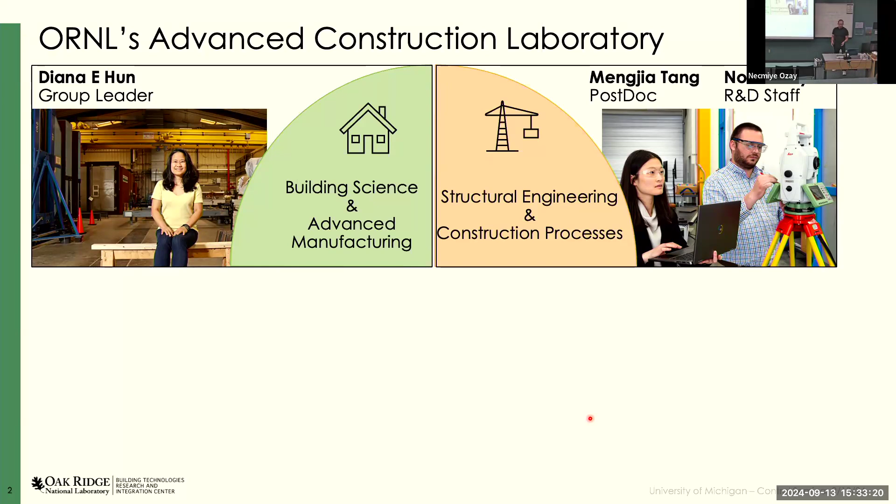You have me and Yifang Liu. We are the controls and robotics team, always on the whiteboard writing math and pulling our hair out. We recently hired two postdocs who are our computer science and artificial intelligence team. They recently participated in a hackathon at ORNL, where we tried to drop some of our deep learning algorithms into Frontier, the fastest supercomputer in the world. So they're there hacking and having fun. It's been great.

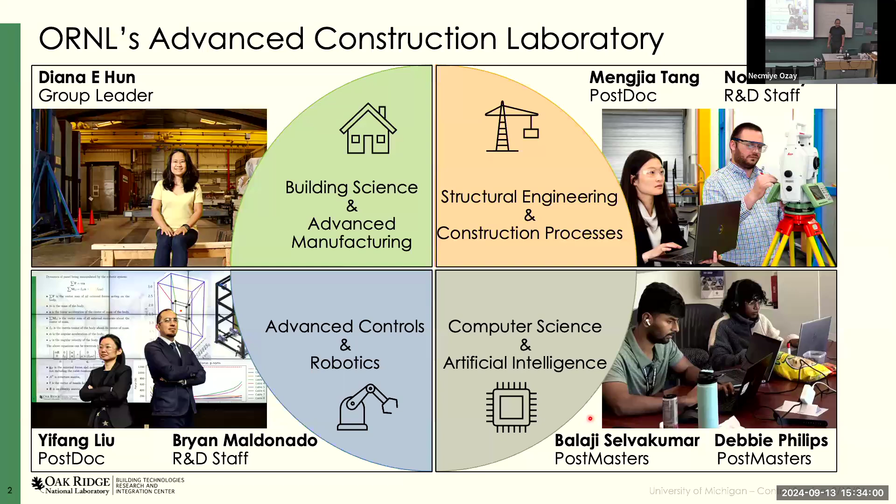So let's start with some motivation.

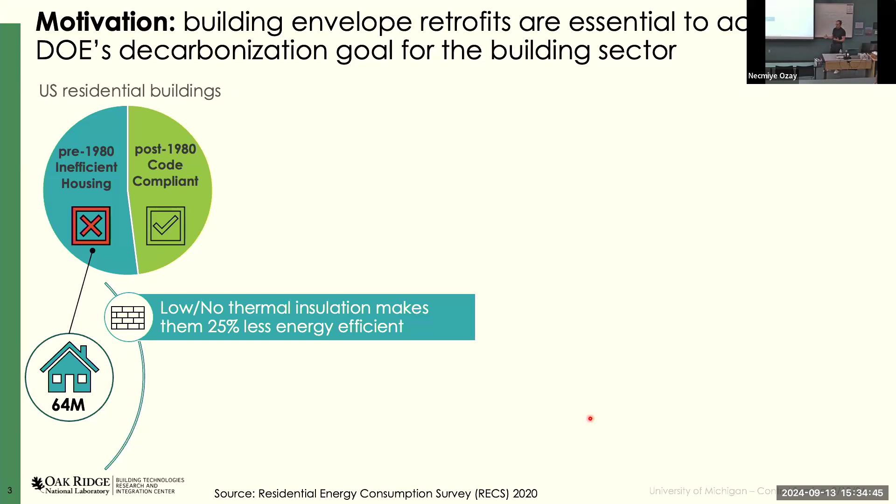The main motivation is what's happening right now with residential buildings in the US. Most buildings were built before the 1980s, before building codes started to be in effect in the US. This means these houses are very inefficient, and there are more or less 64 million of them. They're inefficient because they have low or no thermal insulation, so the heat produced to warm the home escapes through the walls or roof, or in summer a lot of heat gets inside, requiring more cooling capacity. That makes them 25% less efficient compared to modern houses.

Because of this waste of energy, a lot of the carbon dioxide emissions produced within buildings comes from the envelope, which is responsible for about 70% of this. The envelope is basically the walls, the roof, everything involving the living space. So there is a lot of heat wasted. Another important thing is that out of the 64 million houses, 50 million belong to low-income households, meaning they have to use a lot of their income to pay energy bills.

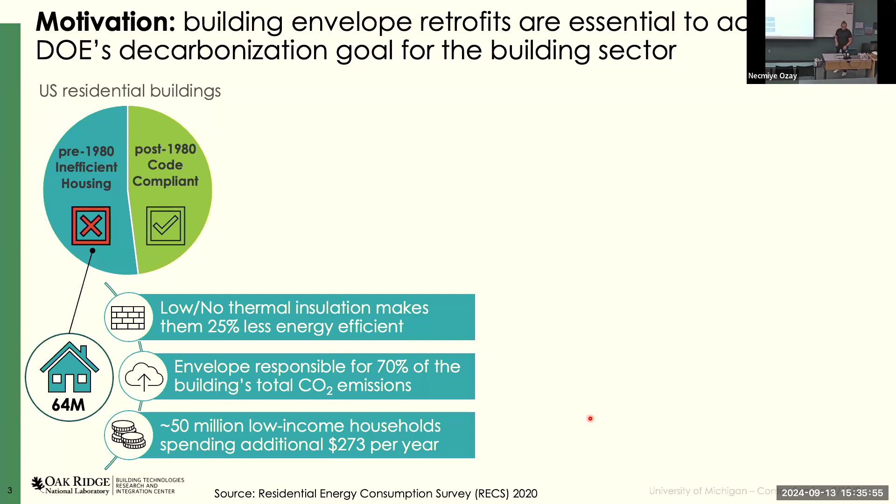On average, low-income households have to pay around $273 per year in addition to what people with more efficient houses have to pay. So this is a lot of burden for low-income households. That's why the Department of Energy now has this big project and big investment on retrofitting these old buildings.

We want to bring these old buildings up to code, make them more efficient. There are basically three main ways of doing it. You can retrofit the building equipment, so that's your HVAC, refrigerator, lighting, things like that. The fenestration, which are the windows—nowadays there are very high-tech windows where you lose very little heat through them. And the last part, which is the one that I focus on, is the building envelope: walls, attic, and crawl space if the house has one.

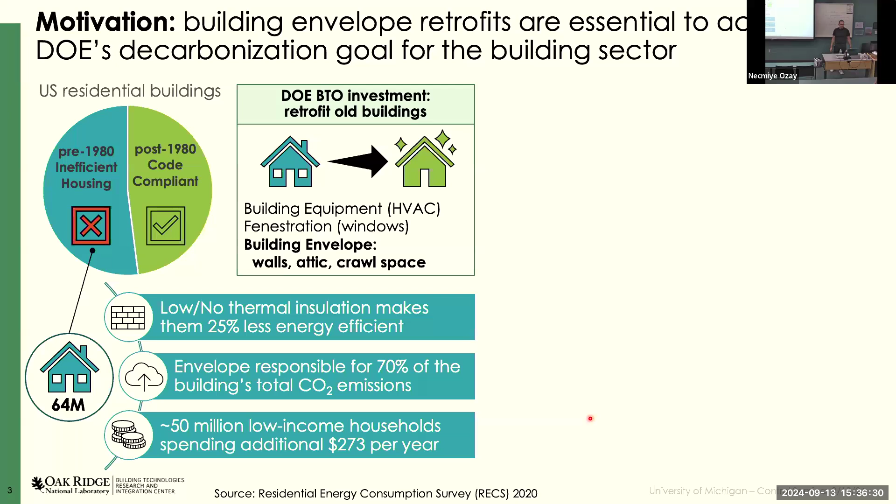In order to communicate this, the Department of Energy has written two main pieces of information. One is the National Blueprint for Building Sector Decarbonization, which basically elaborates all the issues that exist right now and all the potential for researchers like us to tackle and help this sector. The other thing is super important: one of the Energy Earthshots, these very ambitious goals the Department of Energy has—like hydrogen or solar—now affordable home is one of them. So there's a lot of interest right now in bringing these houses up to code and making them more energy efficient.

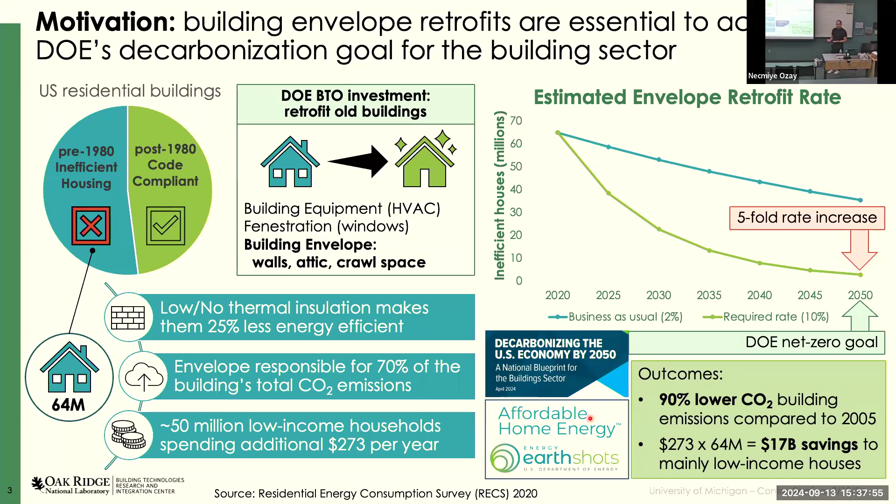So that is the motivation. That's why we're doing this.

So what is the challenge? One of the main things is that the building sector has typically resisted automation. This is a comparison of different sectors. You can see agriculture—if you compare 1940 to 2016, agriculture has grown by a factor of over 1,000, manufacturing by a factor of over 700, and building construction by a factor of 6. This is quite embarrassing. You can see the differences here—the only difference is that now we wear hard hats, which is good for safety, but otherwise it's still very manual, very rustic. There's been a lot of inertia to automate in this sector.

Another important challenge is that right now we're facing a lack of skilled labor. There is a labor shortage—the latest numbers I heard were about 500,000 people that we're lacking to keep up with the demand of housing. So it's a severe problem.

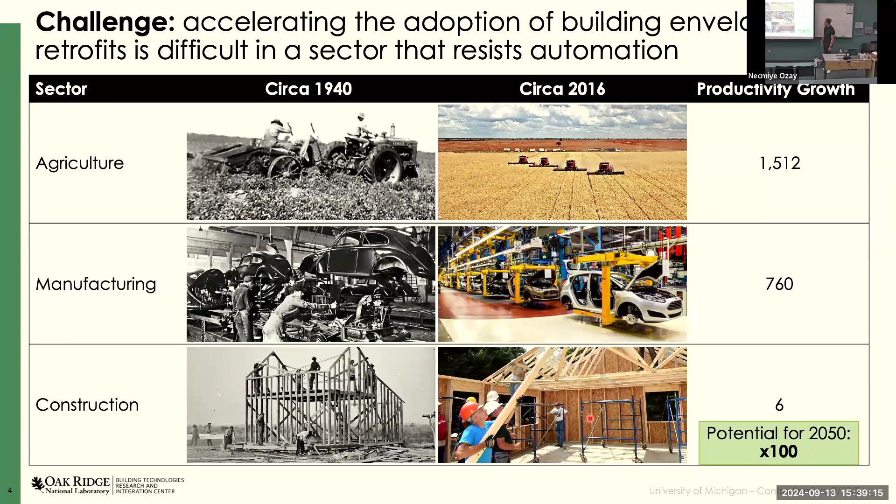So with all of these plans that we're going to present, the potential for scaling this number is to bring it up to at least a factor of 100 by 2050. Again, super ambitious goals.

The innovative solution for this actually comes from Europe, from a program called Energiesprong, which has been quite successful and popular. It can be found in the Netherlands, Germany, France, and the UK. Basically what they're trying to do is retrofit buildings with the minimum amount of disruption to the occupants. So that's an example of a building that you want to retrofit.

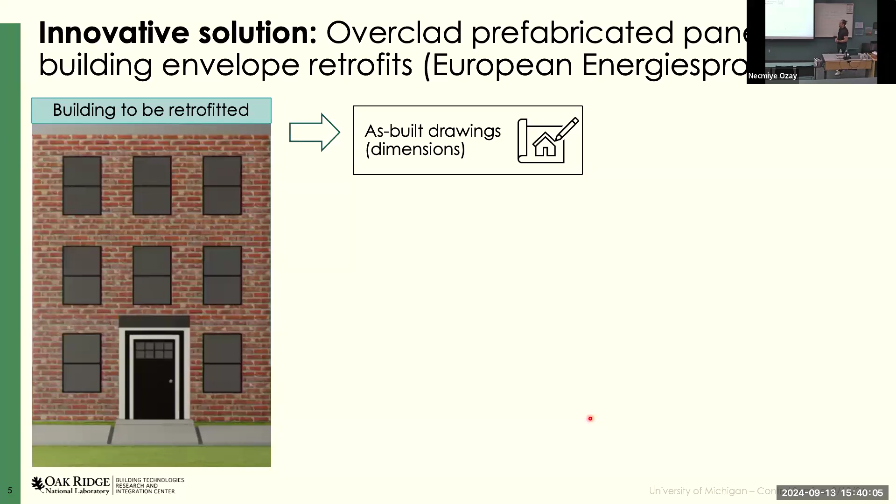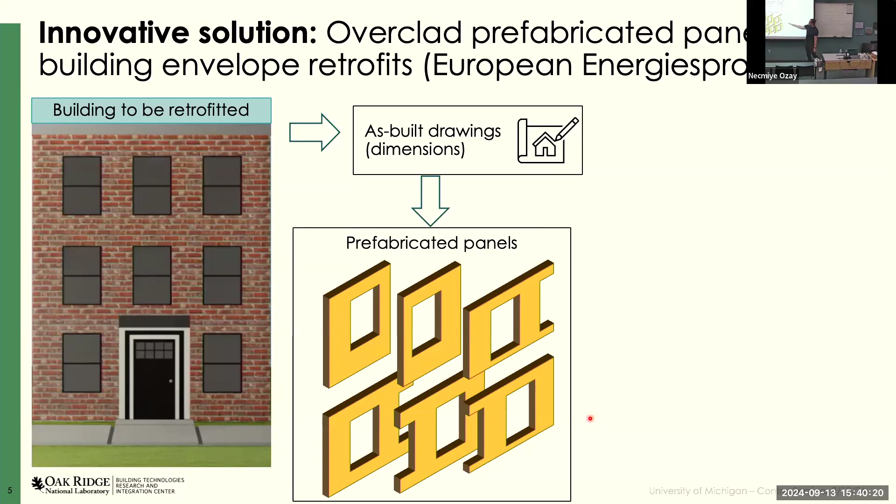What you do is a survey to determine the dimensions of the different components—you measure where the windows are, where the doors are, the dimensions and all of that. You create an architectural drawing of it. Then you design panels that can be prefabricated, meaning they're made in very tight manufacturing conditions, super high tech. Then you ship these to the construction site and install them, like a Lego block set—you cover the building, and now it's up to code. Super popular, but it comes with a lot of buts—there are a lot of problems here.

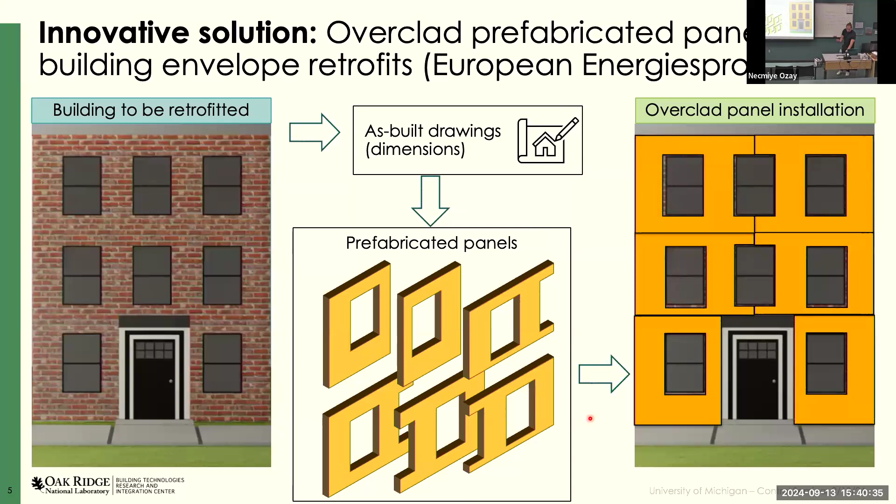Let's see—this is a video from Estonia, from one of our friends there, showing an example of an older building being retrofitted.

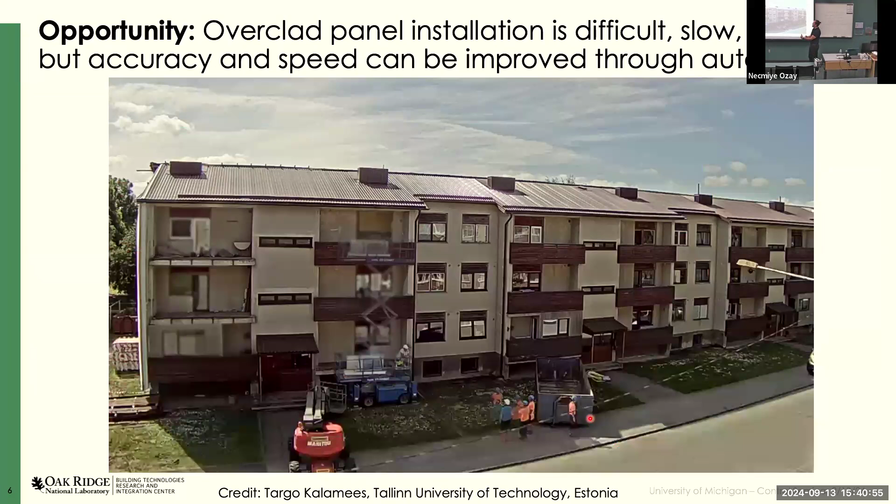So in this, the term that you're gonna hear a lot is overclad panel installation. Overclad meaning that it's over the existing wall. And let me play it.

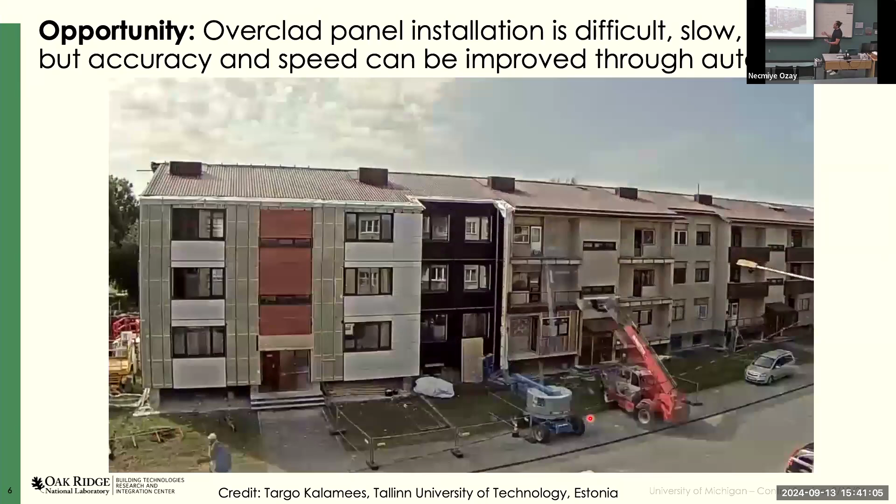So you will see that this is very manual. It requires a lot of different machinery. They have to remove certain components. Then we bring the panels, and they start installing the panels here and here. These are the prefabricated overclad panels that they install.

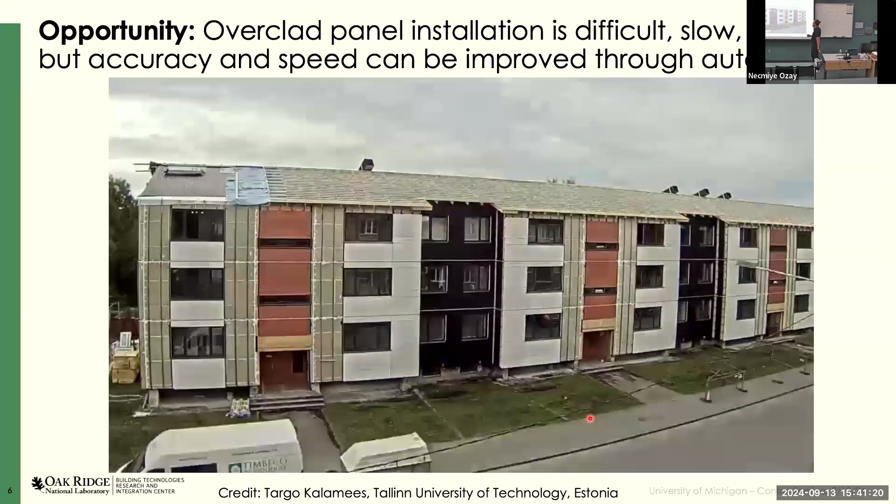They also have to deal with the roof, but you see people everywhere. There are people climbing the roofs, people installing the panels. So it's still very manual.

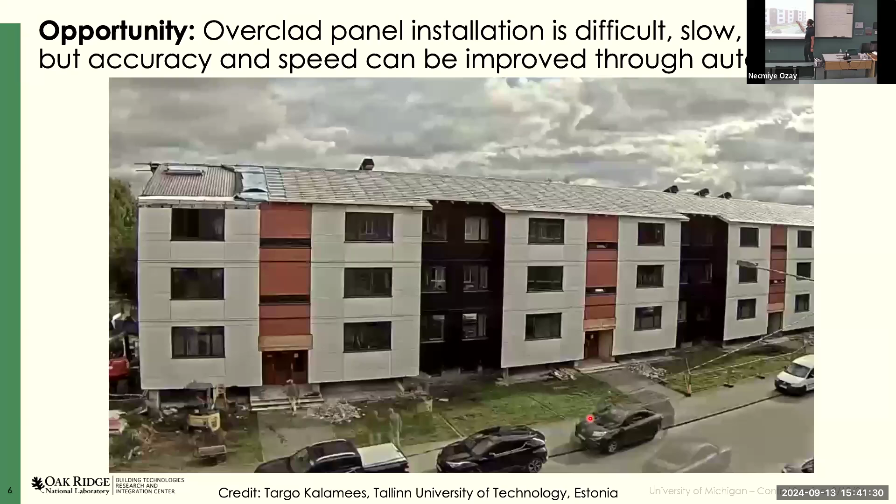There is no true feedback, so you don't really know if the panels are installed correctly. There might be some air gaps, or there might be some overlap between panels. That means you have to then rework and cut some pieces of the panel, which amounts to a loss of time and money.

So our research focus is to automate this process by closing the loop. I'm gonna walk you through what the control loop looks like. You have the building that you want to retrofit, and you have the panel that you want to install.

The first thing that you do is create a digital twin of the building. Basically this is a geometrical twin where you have all the architectural designs, where things are, because you need to know your target position. We are doing this using LiDAR scanners, super accurate LiDAR scanners.

Now that you know where things should be, you need to know where things are. So you need to track how these prefabricated panels move in space. We are using laser trackers for that, IMUs, and we want to introduce cameras as well. Basically this tracks position, orientation, linear velocity, and angular velocity.

So then you know where you want your target, you know where you're at in real time, so then you can calculate the error. This is the key part of the feedback loop.

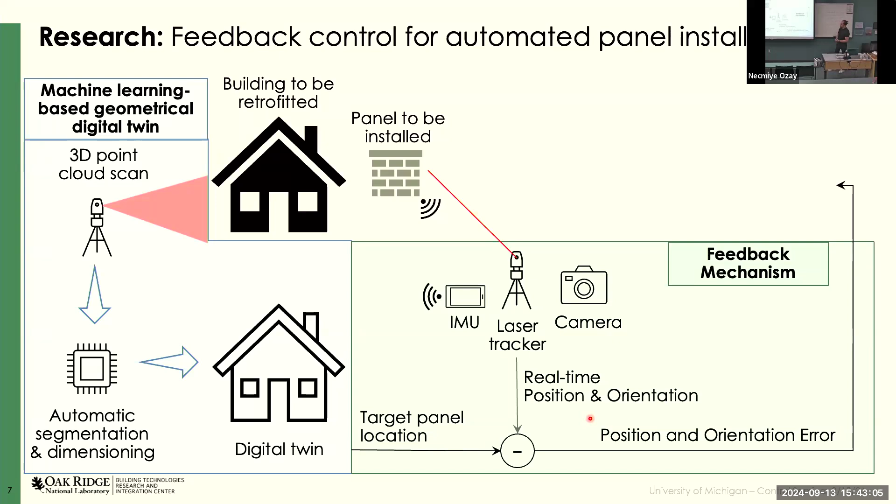Once you have that, you could provide this feedback to a human installation crew, which I'll discuss later on. But you could also provide this feedback to a robot. And that is the last part, how you can use this to enhance robot installation, to make installation faster, less dangerous because you don't have crews moving along installing these panels, and also more accurate.

So I'm gonna talk about each of these components separately. You can see how the dynamics and controls come in here, and the machine learning comes in that part. So I'll show you how we generate digital twins of buildings.

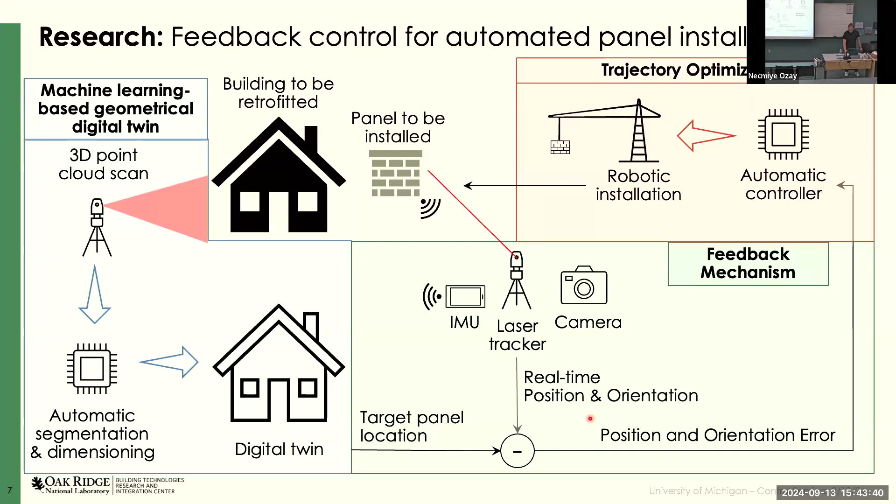In the first part, the problem is that you need to get the accurate as-built dimensions. And I really want you, after this, to go to your house and take a square ruler and try to find right angles. There are no right angles in houses.

Windows, all of them are crooked. Walls are probably not plumb. So you have to face all of these issues when retrofitting this. You have to capture every single crookedness in order to design the panels appropriately.

Right now, with some commercial methods, you can get accuracies of around 13 millimeters, which is half an inch. But we really want to achieve an accuracy of 3 millimeters, because the more accurate you are, the tighter you can retrofit the building, and the tighter you can keep the heat inside. It's all about efficiency, so you don't want to have air gaps. That is our target.

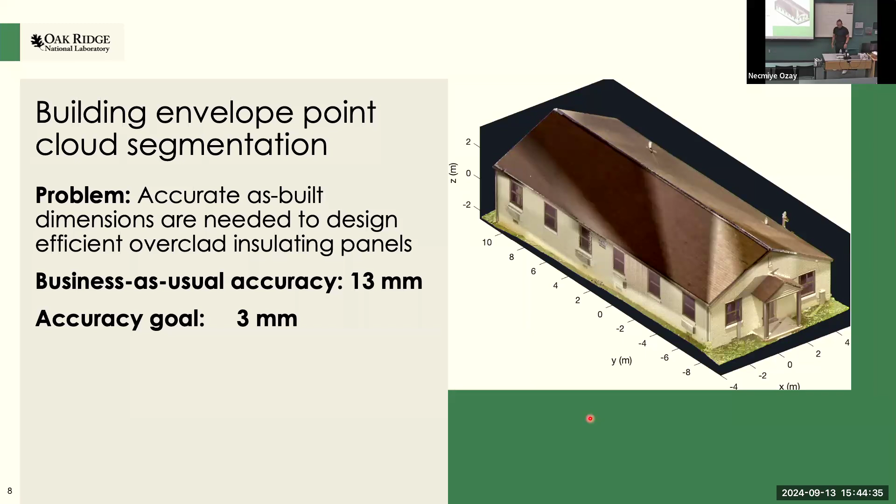So we developed this algorithm that is the automatic point cloud building envelope segmentation. We call it Auto-CuBES. Basically what it does is it takes this point cloud. We use LiDAR to scan the building from all the different facades, put all the point clouds together, and then we have this super nice, highly detailed twin of the building.

But we do not need to know all of these details. So what we really need is to extract the dimensions of each component, simplifying from around 32 million points to around 300, which are the really important points that you need for designing these panels.

And the idea is that we are using several machine learning algorithms to do this, instead of having a human try to do this segmentation task. We have had excellent results, especially on time reduction.

There are companies that can do this process manually, and they will tell you, yeah, we can do it, but give us 2 days. There are some semi-automatic methods that maybe can do it in 4 hours, but we can do it in 12 minutes. So this is a significant reduction in time.

But the main gain is really the accuracy, because now you have the true accuracy of the LiDAR machine to detect the dimensions, rather than the human subjective perception of, oh, this is the dimension of the window, or this is the dimension of the door, which once you drill down to the details, is very subjective how we measure things. So this is quite interesting to have this part.

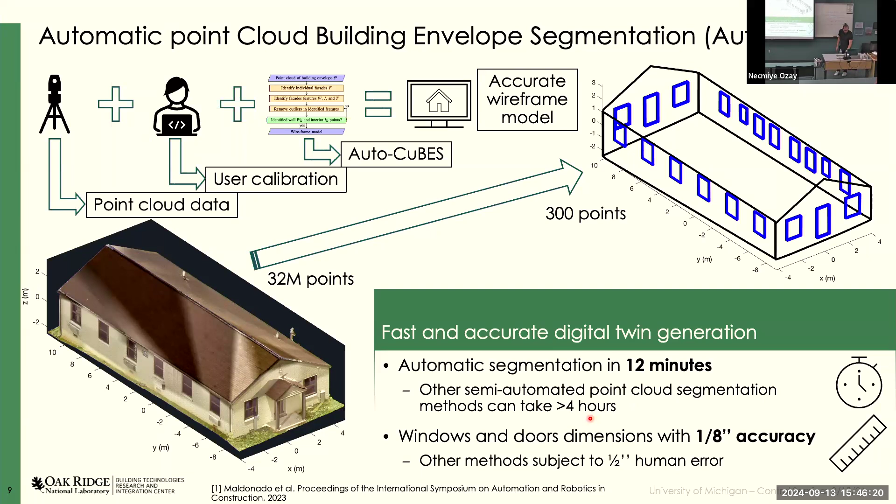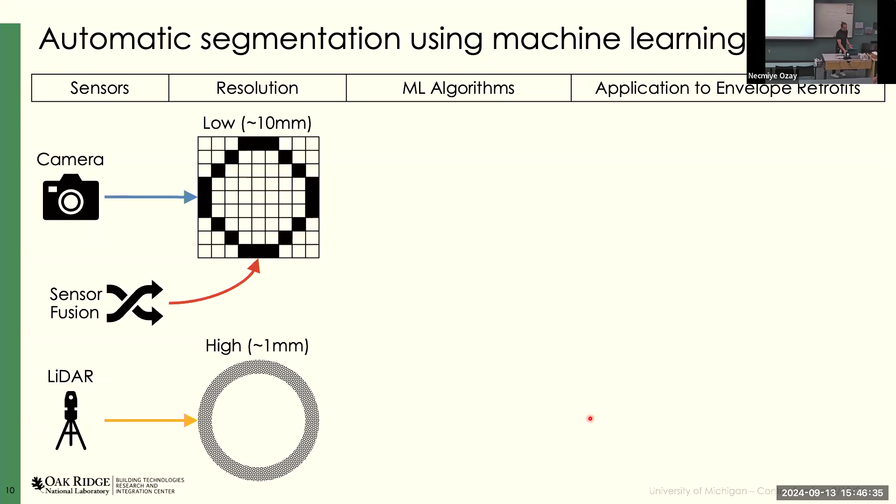So let's talk about the machine learning part. There are 2 main sensors that are used for segmentation: the camera and the LiDAR. If you are into machine learning, you might have seen that the camera works very well, because the pixelation basically gives you a matrix, and you can do a lot of nice matrix operations like convolution and things like that. But you lose accuracy, and we are all about accuracy.

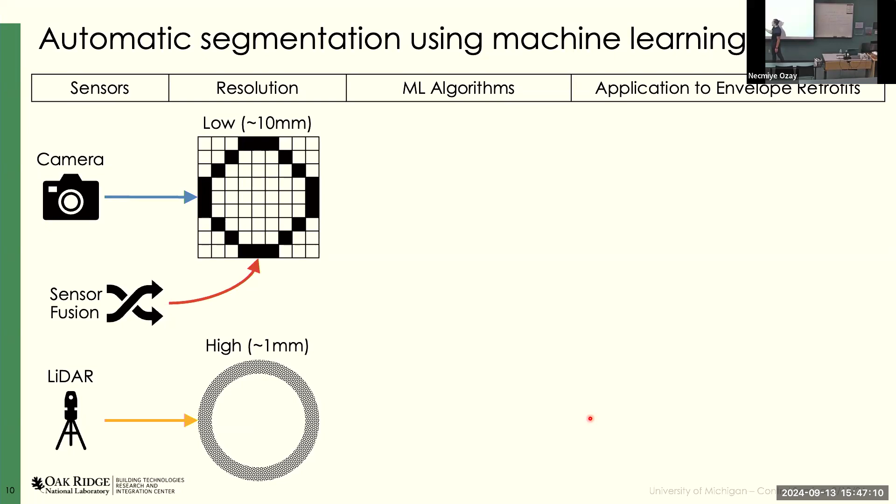So the LiDAR can give you a super nice, fine, accurate point cloud, but now you're losing order, right? The pixels in a camera are an ordered array. If I give you an array and I shuffle the elements, it produces the same thing. So there is not that nice structure. It gives you more detail, but it loses that structure that cameras have.

So precisely for that reason, supervised learning has been used mostly with cameras, or even if you have sensor fusion, the segmentation really happens in the camera.

So there has been a couple of studies that use cameras for segmenting buildings, but again, these are not automated. There are promising developments on deep learning where you can do segmentation of point clouds, but these segmentations occur with everyday objects like chairs, tables, things that people just scan, or autonomous vehicles. So you can segment the road from the trees, but there is no really data set on building envelope.

So we cannot train a neural network if we do not have labeled data. So that is the problem that we face. That's why we went for unsupervised learning.

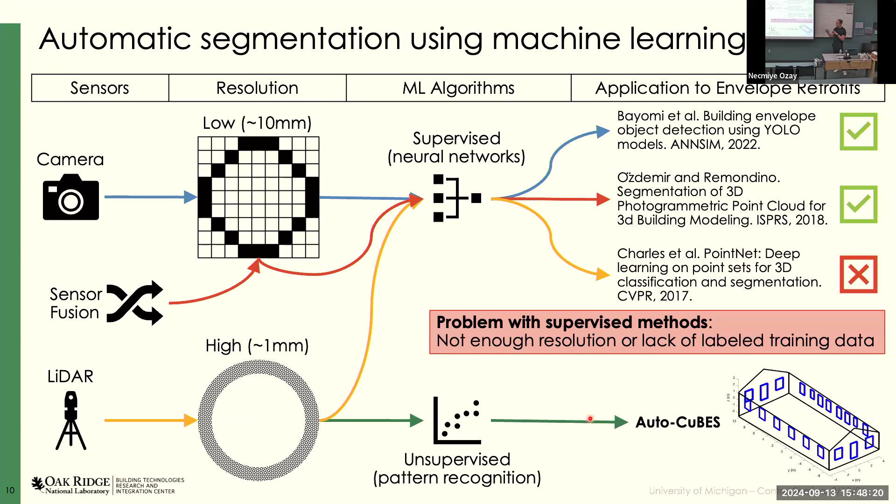And the challenge here is that with supervised learning, you have just a network that does everything for you, while with unsupervised learning, you have to be more systematic. You have to go step by step, trying to break the problem into simple components, and then break that component into more simple components, and then solve the problem.

And the cool thing about all of this is that we can observe a lot of differences between the wall and the window, but geometrically there is a very clear difference in which the window most of the time is recessed with respect to the wall.

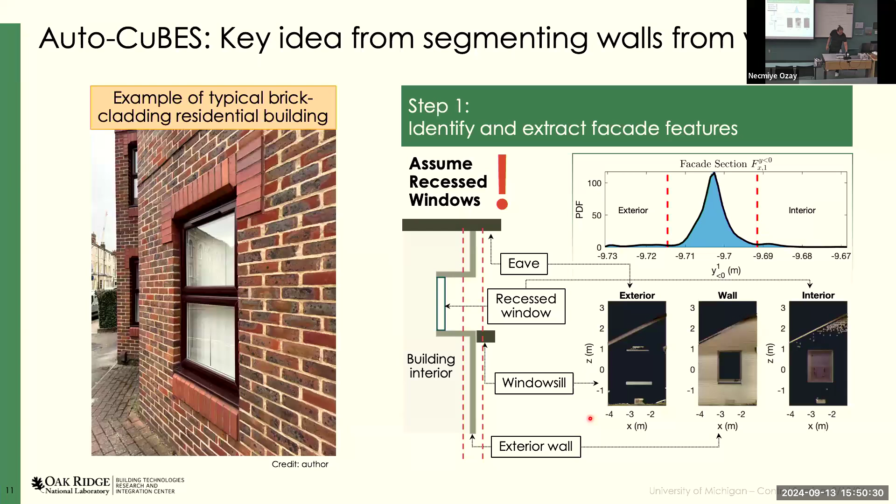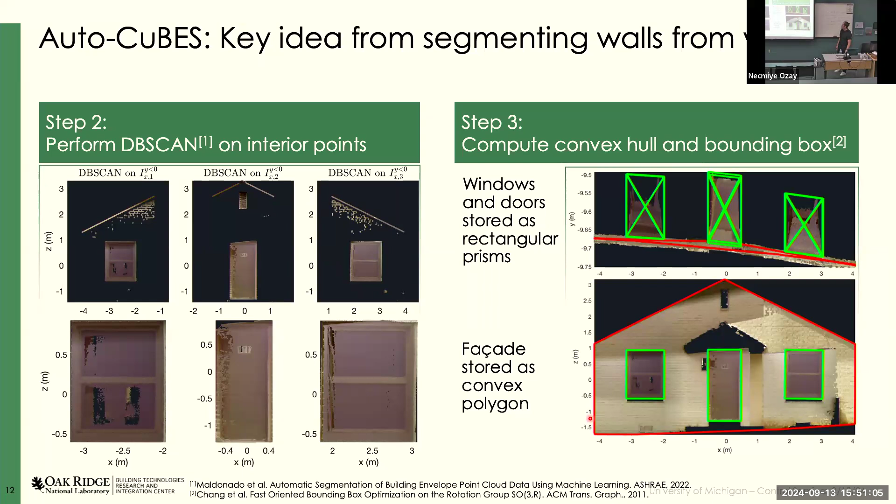So you can use DB scan and say, okay, I want to find the location where the most density of points are. You find them, and after that you simply solve the bounding box problem, which now there are algorithms that can solve very efficiently. You just use a bounding box to find where the things are. Of course you're constraining this as a rectangle or a box, but it works well enough in our experience. So that is how you can generate this digital twin from the data and extract the parts that you want.

So the next part is, okay, you know where things need to be. How do you know where things are?

We call this the real-time panel position and orientation evaluation. You can see in this picture a traditional way of installing panels. You have your prefabricated panel here, a hole where the panel should go, a crane with a crane operator, and the installation crew. The installation crew has walkie-talkies, and they tell the person operating the crane, okay, move it a little bit to the left. Okay, now move it to the right. Okay, I think this is good. Just drop the panel. Okay, yeah, seems good. Okay, move to the next panel.

So there is not really a good way of measuring how well the installation is happening. There is a lot of eyeballing and hand waving, and that gives you a certain level of accuracy, but not the one that we need.

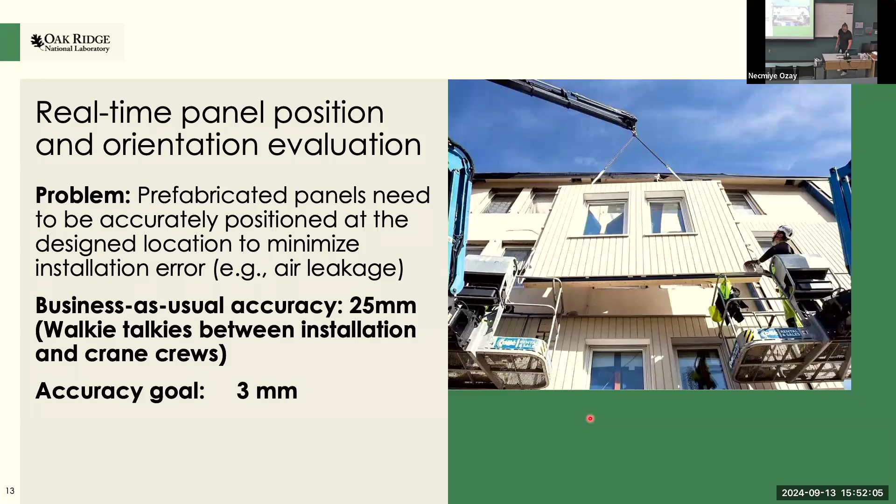So how have we done this? We created this digital tool that we call the real-time evaluator, which actually recently won an R&D 100. We're very proud about this. The whole point of it is, once you have the digital twin, you can track where the panel is, and then compute the error and communicate this error to the crew. So this is your feedback mechanism.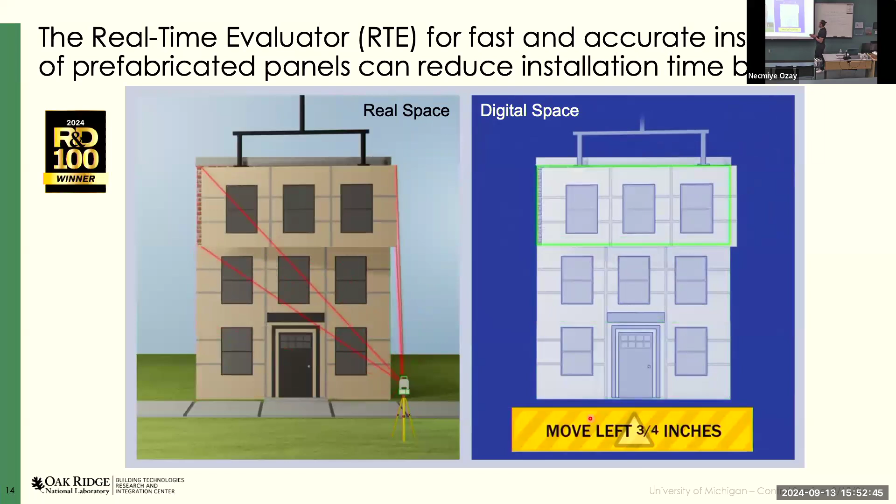Right now it's human in the loop. You give the feedback to the human to say, you are 3 millimeters off, move it here. You are 3 millimeters to the front, push it back. So you can communicate with the crane operator in a very precise way, and you can see in real time how the error reduces.

We have done this obviously at the lab scale, but also at the big scale, and it actually works quite nicely. So what do we need from here?

Quite accurate equipment. To track where the panel is, we install these prisms in the panel, and basically this is a robotic tracker. So the tracker locks onto the prism, and then it can follow the prism super, super accurately. But that really only gives you position.

At the beginning, we started playing with 3 of them, because if you have 3 prisms, you can basically scan each prism, and you have a plane which gives you the orientation. But it really takes too long to do that. So we are right now playing with IMUs, and this is nice because this gives us orientation and angular velocity. This one gives us position. So these are the current feedback sensors that we're using.

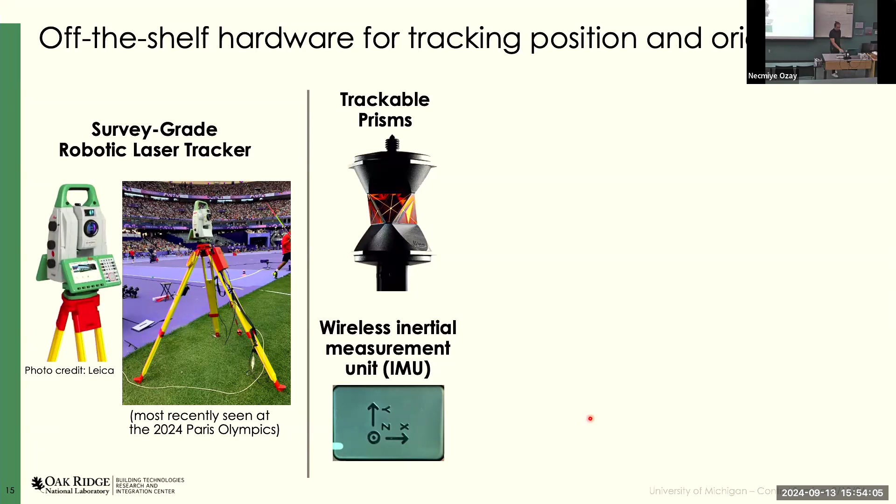And these 2 pieces are in some sort of a clipping mechanism that you clip to the panel, because you have to be able to remove it. You cannot just leave it there. This little prism here is around $1,000, so you don't want to just sacrifice $1,000 for the sake of efficiency. So you have to be able to recover them. So there we have developed these systems that you can attach to the panels and detach from the panels in order to keep track of where they are.

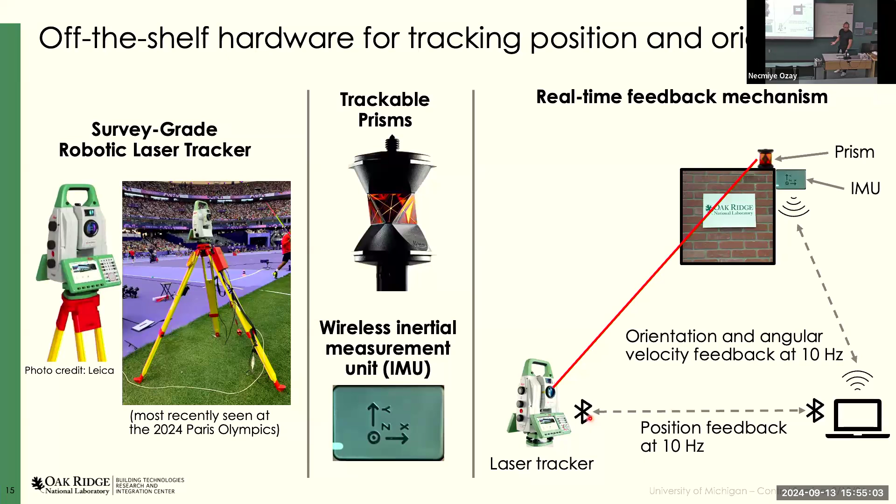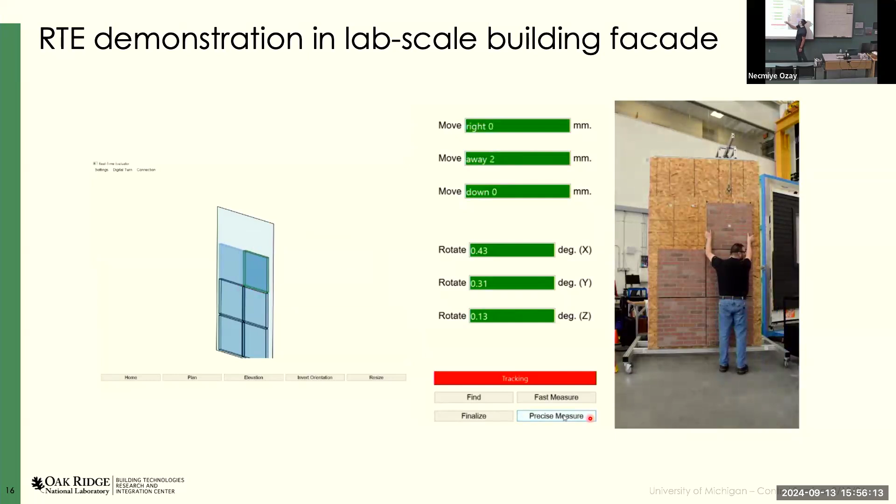The position can give you quite close numbers, but then Nolan has to go back to the computer and tell the robotic station to look for the 3 prisms and give me the orientation numbers. So now the orientation numbers update, and then you can just focus on the position, and everything becomes green, meaning you're good. As I mentioned, we've also tested this in larger scale experiments, which have been working quite well.

We had a nice visit from Secretary Granholm, former governor of Michigan, now Secretary of Energy, who came down and visited us. She was quite happy about our partnership with Knoxville and the low-income communities there.

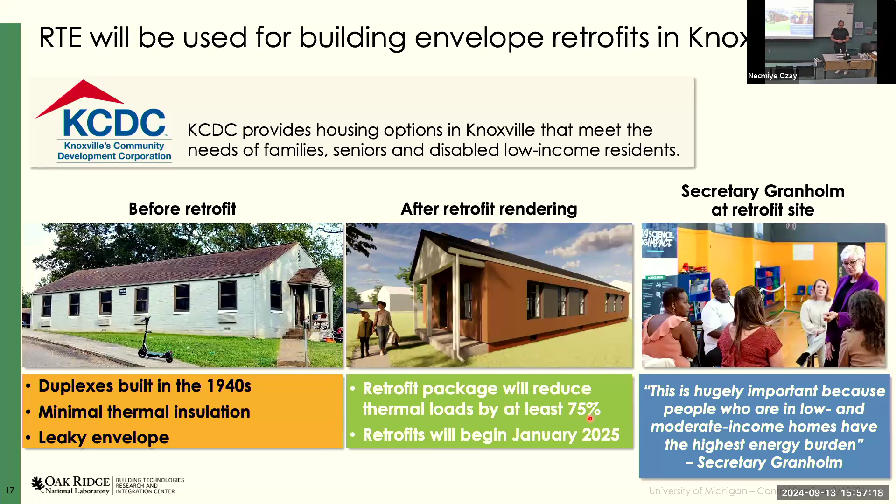So, okay, the last part, I guess this is the more fun part for you, where I can actually show you equations. In this case, we have where things should be, that's from the digital twin, and where things are, coming from all these sensors I was talking about. So what do you do about it now?

Instead, you can have a robot that basically lives in an enclosure that could be as big as the building itself, but doesn't have to be taller. And then you have a bunch of cables coming from the panel, and depending on how you pull the cables, you can adjust the position and orientation of the panel.

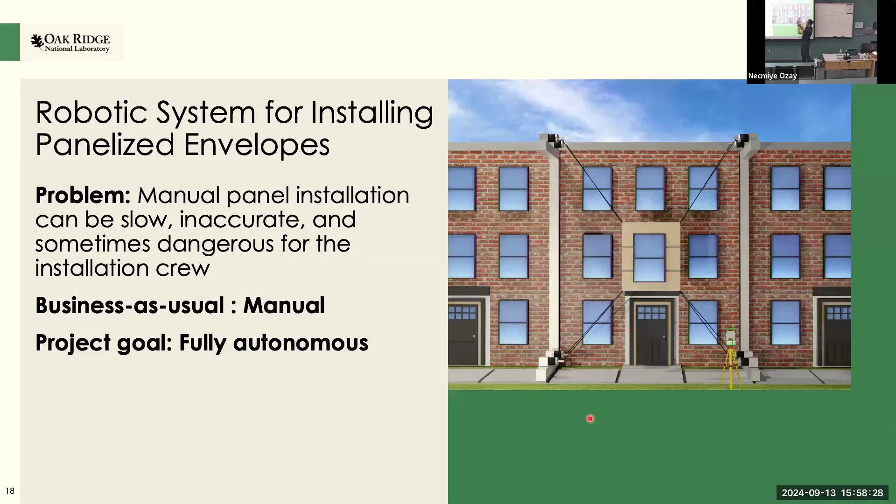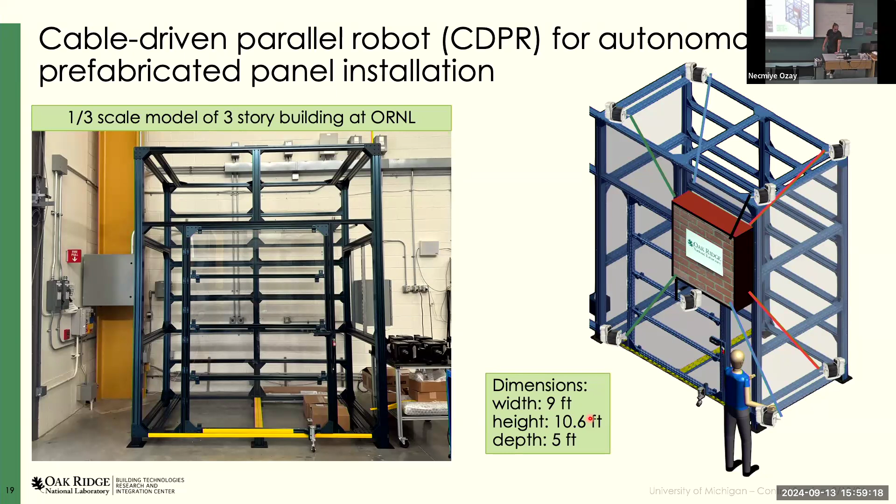So whenever we were brainstorming and trying to figure this thing out, we thought we were super clever. Then we started doing a literature review and asked, okay, what are other people doing? And surprise, surprise, Europe is once more ahead of us.

This is a project called Hephaestus, done between Spain and Germany, among other institutions, but those two were the biggest. It's a cable-driven parallel robot that can install glass panels, not necessarily overclad insulation panels, but glass panels. They have all the cables, all the equipment, and they have actually demonstrated how you can operate this massive thing in order to install large-scale products.

The problem is that this robot operates in an open loop way, so it doesn't reject disturbances. I was lucky enough to talk to the Hephaestus team, and they told me: we calculated the trajectory, we knew the force that we needed, and then we let the robot go.

And then at the end of the day, it didn't arrive to the position we wanted. We were 2 inches off. And the reason is because they had disturbances along the way. If you have a high wind hitting on one of your panels, the robot is going to move. And because you don't have feedback, you cannot accommodate for the error. So we think we can do it better, but we'll see. Maybe if I get to come back, I can get you better results a couple of years down the line.

So you can see here how we have modeled this type of robots. It's all rigid body movement, so you have Newton's translation equation, Euler's rotation equations. We have a nice set of states, which is basically position, orientation, linear velocity, angular velocity. And then the control command are the tensile forces in each cable.

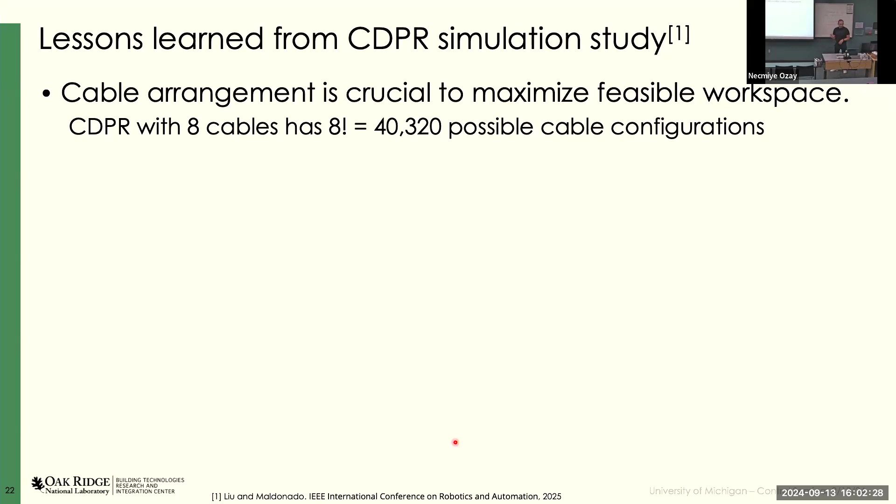We started with the simulations. First of all, one of the many lessons that we learned is that the moment that you want to design these cable-driven parallel robots, you have to decide how you connect the panel to the robot frame. And if you have 8 cables, you have 8 factorial combinations. So we had to basically run simulations and evaluate what was the best combination. And we ended up with 4 very promising models at the end of the day.

The second lesson that we learned is that friction actually is very important, and I'll show you why. This is a simulation of the model I showed you before. You can see the blue line is the target trajectory that we wanted, and the black one is the simulated trajectory. Super oscillatory - we really didn't understand what was going on. We were looking at this and like, this doesn't make sense. We've seen these robots work, they don't vibrate.

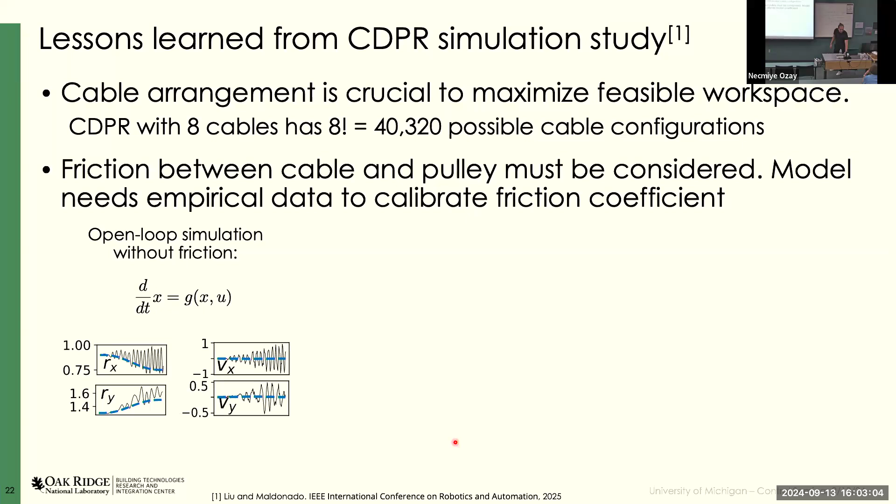This doesn't make sense. And then we linearize the system and we look at the pole distributions, and we saw that some of the models have unstable poles. I was like, this doesn't make sense, what is happening here? And if you are familiar with this type of things, you know that one way of fixing it is to add a linear wet friction - so you need a dissipative term. Our model was so theoretical that it was not dissipating energy, but friction actually dissipates energy. And then when you add friction, magically everything converges again because you're moving this unstable pole away. So that was one of the cool insights - we were like, what is the vibration happening? And it's because we didn't have a complete model.

Obviously, this is not a physical number, and because our experimental setup is not running yet, we do not have good numbers - we have approximate-ish values. But this is something that you need to get from data. So this is a data-driven approach where you need to know what are the values of the numbers in that matrix. But the theory says that this is the reason why.

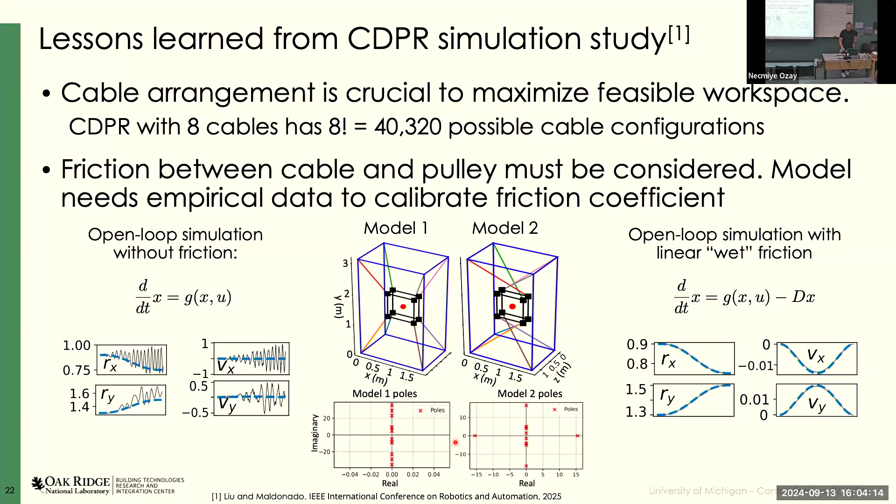Okay, so now that we have the model, the next step is what is the best way to go from point A to point B? So obviously, if you've taken Professor Kremanowski's class, you know about the brachistochrone problem - that was my main inspiration. Your intuition tells you, yeah, probably the straight line is the best path. But let me show you what actually is the best path.

So we have a multi-objective optimization. We want to minimize the force, which ultimately minimizes the energy that we spend because it's all about energy efficiency - the first term minimizes the energy. The second term penalizes the jerk of the state, which attempts to make trajectories more smooth, because you will see what happens if that goes away.

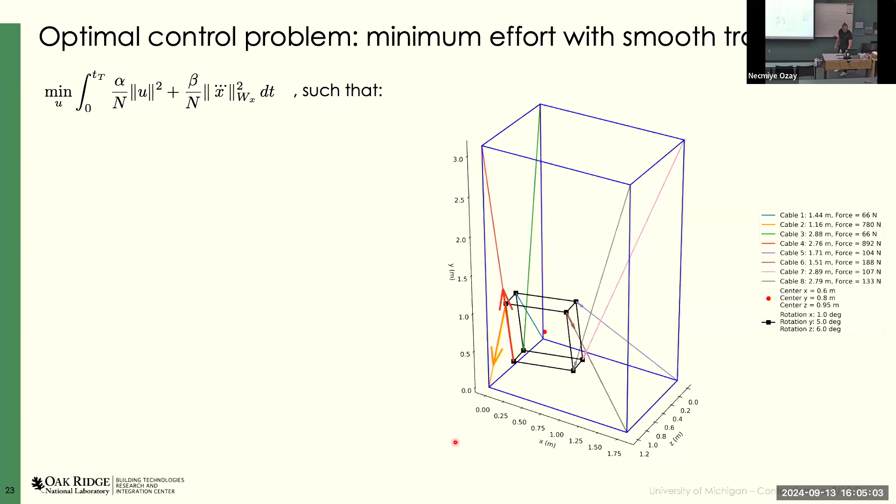So then obviously the constraints are the dynamics. You have the dynamics, you have the bounds on the force in the cables. You also have path constraints, mainly for safety. The first constraint basically tells you that the panel has to be within the frame, otherwise it's not feasible. The second ones are more of realistic safety things.

You don't want the panel to be super tilted, and you don't want the panel to go super fast. Right now, we're limiting this movement to 20 centimeters per second, so it's a very slow movement. But we're talking also about very heavy panels, so you don't want to have a 2-ton panel moving around super fast, similar to the angular velocity. So very, very small velocities here. We don't want to have issues with that later.

And the last part is you want to start stationary and finish stationary. So you have an initial position and orientation, a final position and orientation. Usually the final orientation is 0 because you want to be plumb and level. This equation here is a nice compact way of writing the dynamics whenever d/dt equals 0, basically, so you can write it in a nice compact linear way. Then you can come up with the optimal trajectory of moving from A to B, calculating the force and all of that, and arriving at a stationary condition.

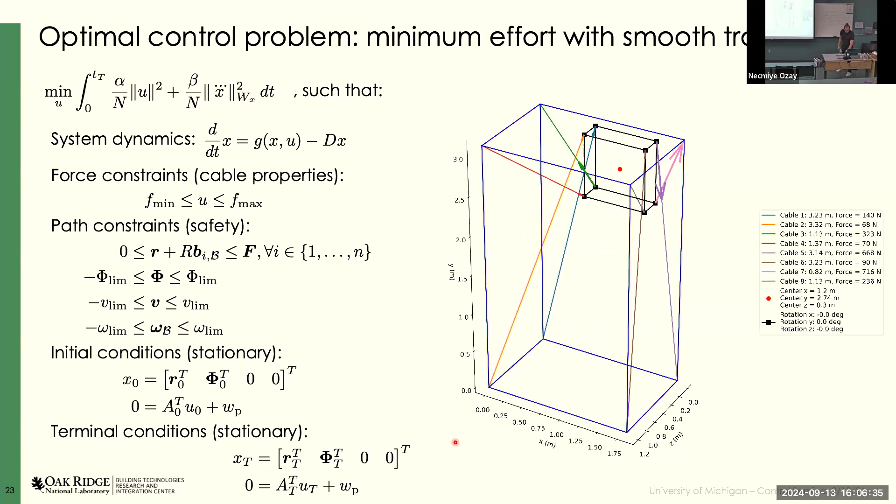So what have we learned from here? You have two coefficients, alpha and beta. If alpha is super low, basically you don't care about the control and you want your trajectory to be as smooth as possible, which really approximates a straight line. So if you don't want bumps in your trajectory, just take a line and be done. But we really want to minimize the energy, right? So then we start cranking up that coefficient, and you can see now that this is more curvy, more like an S shape.

We increase even more, and now you can see a little bit more of what this machine is doing. It's picking up the panel here, and then it's rapidly trying to go back to the central axis. Because think about it, if you have the panel in the central axis, this becomes like a hoisting movement. You don't even really need forces in the lower cables because everything is in equilibrium, and you just need to hoist with the 4 upper cables, bring it up, and then drop it in the goal position. So that is what it's doing, but we still keep smoothness of the trajectory.

So if we remove the smoothness, you can see a very sharp trajectory, but very clever. What it's doing first, in order to get to the central axis, is using gravity—it's actually dropping the panel first, because you're minimizing the force. So you drop the panel to the central axis, then you hoist up, and this last movement is quite expensive, but it's short. So this entire trajectory really, really minimizes the energy that you spend, but as you can see, it has quite sharp turns that might not be good from the vibration point of view.

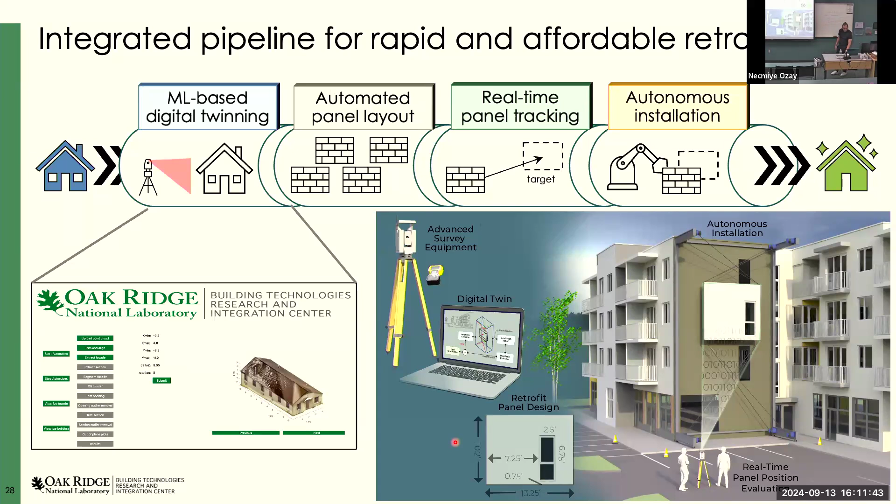The last thing is that we are encroaching into new construction. I took this picture yesterday from Liberty Street. I was walking there and noticed that this building is being built with prefabricated components. You can see here all of these rectangles, panels being shipped to the place. You can see the crane hoisting the panel, and workers moving it, talking with the walkie-talkie with the crane operator, installing the panel in this part. So all of this could be relevant for even constructing new buildings.

So with that, I'll leave it for questions, and thanks for the invitation.

From your slides, it shows that this technology is mostly for some specific shape of building, not very tall. So what if this building were very high, like 10 floors? When you showed the previous slide, I was surprised it's your method, but oh, it's not—it's the old method using workers. So what if this technology were used in high buildings? I'm thinking the robotic arm would need to be much longer and stronger, and disturbances like strong wind would be stronger too, meaning the control system would need to reject that disturbance. Did you consider this for low-rise buildings only, like 3 or 4 floors?

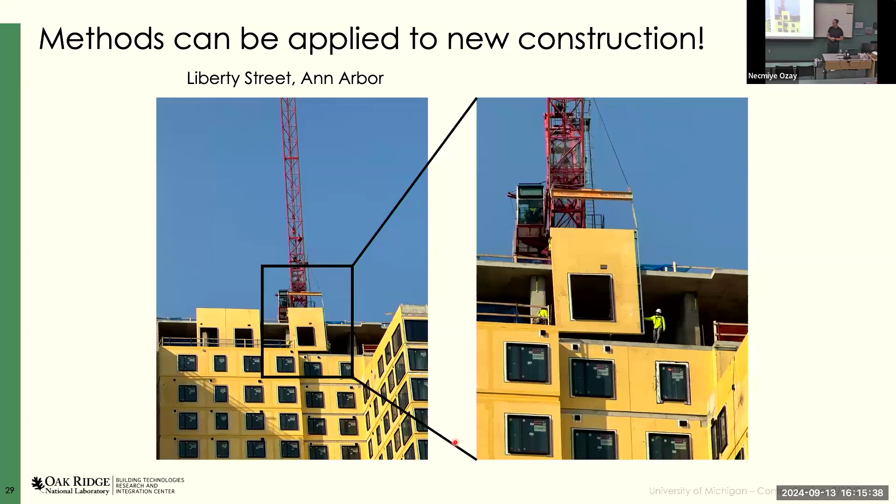Right, nice talk. So my question is about your cable dynamics model. Let me go back... right there. Okay, so you have this nonlinear system model, expressed here as a first order system, and I'm trying to get an idea for exactly how you're modeling the rigid body dynamics.

So you have this capital phi, which includes your orientation angles, right? Have you thought about doing this by just keeping track directly of the rotation matrix, and doing simulation on a manifold rather than this way? Is there a reason why you didn't do it that way? Yes, the reason is that the rotation matrix is too expensive.

It has 9 components, a 3x3 matrix, so that increases your state space for no good reason. There are three ways of solving this: one is using the rotation matrix, which I wrote just because it's the nicest equation, it's the one that I like. The second way is using quaternions, and the third is using Euler angles. Rotation matrix is 9 dimensions, quaternions 4, Euler angles 3 — so Euler angles give you the minimum realization of the system.

So I guess my reason for asking is I wonder if you end up with different levels of problems regarding the damping issues you're seeing. If you model things in terms of the rotation matrix directly, rather than the rotation angles, we might see different or fewer issues related to that.

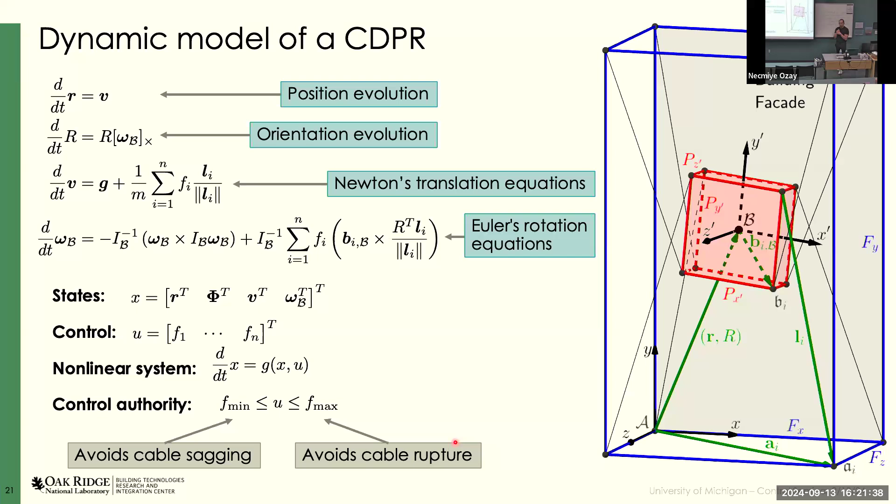So on the note of time savings, if you wouldn't mind moving forward to trajectory optimization. Yeah, let me see, maybe I can just exit. All right, how about this? Yeah, so were you considering...

I guess, is the T sub F term a fixed horizon length, or were you also trying to do the minimum time problem? Sure, that's a great question. So we started with this one with a fixed horizon because it's simpler, I think. The next is to try to figure out the minimum time. So that is our next ambitious thing. We haven't done it yet, but it is in the books. We're going to solve that. Yeah, I want to see how this looks for the minimum time.

So when you go from the cable configuration selection, when you go from factorial of 8 to 4, what criteria do you apply? How do you do this down-selection?

Yeah, that's a great question, I should have put that in the backup slides. Basically what you do is you have your workspace, which is this entire area. Ideally you want to cover the entire area with your robot because you want to retrofit everything here. In reality you can't, because at some point in the corners the force in the cable becomes too high, you saturate that force, you cannot, or you break it. So getting into the corners, for example, is very hard. Our criteria was to maximize the workspace, maximize the positions at which we can have full control authority over the robot. That was one.

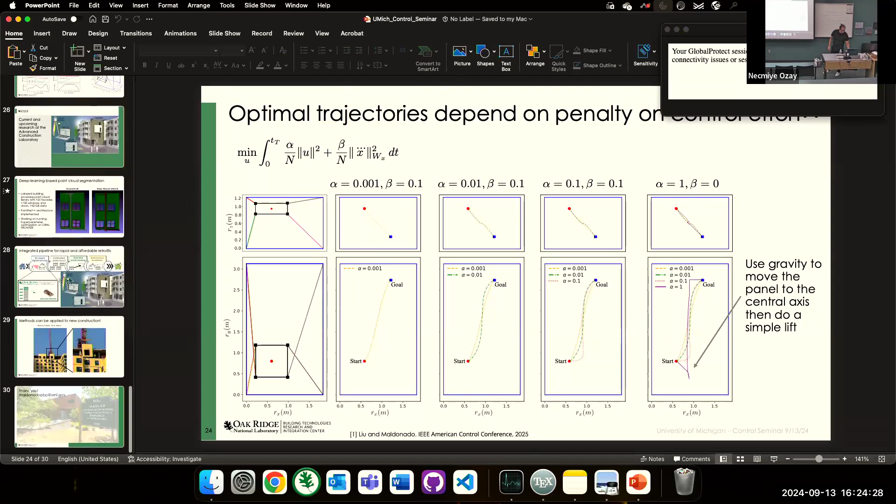Yes, so that is a very important thing we are going to tackle in this next phase. The next phase is integrating all the different components and trying to optimize the process as a whole, which includes sizing the panels. Because let's say you have a range of 3 different panels you can pick from, they have different dimensions. How many panels of which dimensions you pick, and then how you install those panels with the robot, and then based on those dimensions, how you optimize the robot trajectory or even the cable arrangement. All of that is in the next step, because we want it very customized, since buildings in the US are all very unique, so you have to have this level of customization. So we want to tackle the system optimization.

And I have about a year to solve this. I don't know, we'll see what happens after 1 year. It's a very cool problem.

How expensive are the panels and what's the payback time? I don't have the number. You are the second person that asked me this today, and my colleague Diana has the numbers, because that is a very important thing, and the panels are economically sound, they are not crazy expensive. Okay, but you're saving $300 a year.

Once you finally finish the installation, the potential is to save $270 for inefficient houses. That's a long payback time, isn't it, if your crane costs $2,000 an hour to install these?

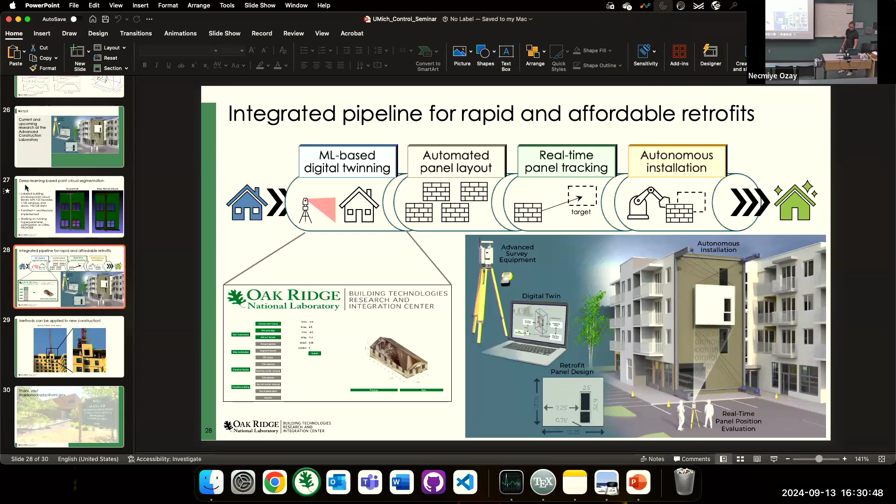If I was to ask another question, it's like, what did you do for your PhD? I did internal combustion engines.

A lot of good work and a lot of things we need help with. Alright, nice to meet you. Likewise, really good job with your design. I also have similar feedback about the message. Yeah, likewise, hey, thanks for that. I had a quick question.